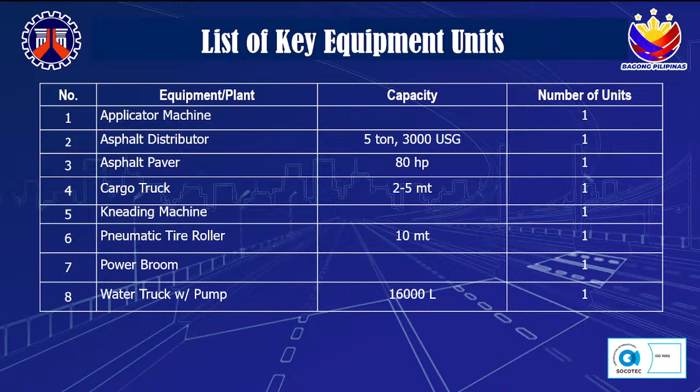Deadline for submission of clarification, March 8, 2025. Deadline for submission of bids, March 19, 2025. Number of copies of bid proposal: 1 original copy, technical and financial envelope of bid split. Place of submission of bids: bidding room, DPWH Regional Office 6, Fort San Pedro, Iloilo City.

For major category of works: buildings construction without piles, low-rise, concrete frame, 1 to 5 stories. Similar category of works: buildings construction with piles, high-rise, concrete frame, cast-in-place piles; buildings construction with piles, low-rise, concrete frame, cast-in-place piles; buildings construction with piles, high-rise, concrete frame, driven piles; buildings construction with piles, low-rise, concrete frame, driven piles; buildings construction without piles, high-rise, concrete frame.

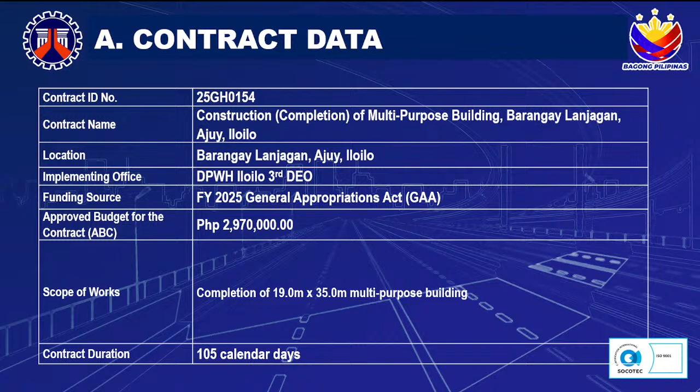ABC is 2,970,000 pesos. Scope of work: completion of a 19 meter by 35 meter multipurpose building. Contract duration is 105 calendar days.

For major category of works: buildings construction without piles, low-rise, concrete frame, 1 to 5 stories. Similar category of works: buildings construction with piles, high-rise, concrete frame, cast-in-place piles; buildings construction with piles, low-rise, concrete frame, cast-in-place piles; buildings construction with piles, high-rise, concrete frame, driven piles; buildings construction with piles, low-rise, concrete frame, driven piles; buildings construction without piles, high-rise, concrete frame.

Buildings industrial plant, low-rise; buildings industrial plant, high-rise; and buildings industrial plant, medium-rise. For the qualifier, major category of works: buildings construction without piles, low-rise, concrete frame, 1 to 5 stories. Example of qualifier: not applicable.

For list of key personnel: 1 project manager, 1 project engineer, 1 project inspector, 1 materials engineer, 1 safety officer, and 1 foreman, with a minimum of 5 years total work experience and a minimum of 5 years of experience in similar works.

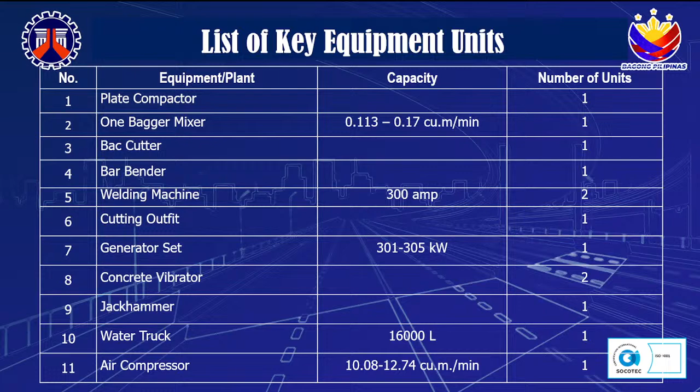For list of key equipment units: 1 plate compactor, 1 bagger mixer, 1 bar cutter, 1 bar bender, 2 welding machines, 1 cutting outfit, 1 generator set, 2 concrete vibrators, 1 jackhammer, 1 water truck, and 1 air compressor. Please take note of the capacity.

For contract ID 25GH0155, construction of multipurpose building in Barotac Viejo, Iloilo. Location: Barotac Viejo, Iloilo. Implementing office: DPWH Iloilo 3rd District Engineering Office. Funding source: FY 2025 General Appropriations Act.

ABC is 14,850,000 pesos. Scope of work: completion of multipurpose building including facilities. Contract duration is 200 calendar days.

For major category of works: buildings construction without piles, low-rise, concrete frame, 1 to 5 stories. Similar category of works: buildings construction with piles, high-rise, concrete frame, cast-in-place piles; buildings construction with piles, low-rise, concrete frame, cast-in-place piles; buildings construction with piles, high-rise, concrete frame, driven piles; buildings construction with piles, low-rise, concrete frame, driven piles; buildings construction without piles, high-rise, concrete frame.

Buildings industrial plant, low-rise; buildings industrial plant, high-rise; and buildings industrial plant, medium-rise. For the qualifier, major category of works: buildings construction without piles, low-rise, concrete frame, 1 to 5 stories. Example of qualifier: not applicable.

For list of key personnel: 1 project manager, 1 project engineer, 1 project inspector, 1 materials engineer, 1 safety officer, and 1 foreman, with a minimum of 5 years total work experience and a minimum of 5 years of experience in similar works.

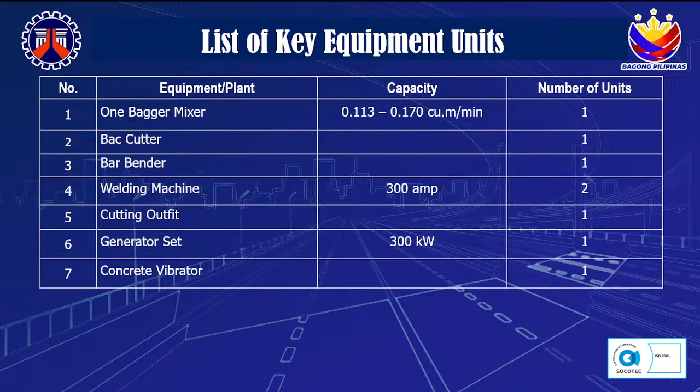For list of key equipment units: 1 bagger mixer, 1 bar cutter, 1 bar bender, 2 welding machines, 1 cutting outfit, 1 generator set, and 1 concrete vibrator. Please take note of the capacity.

For contract ID 25GH0156, construction of concrete road, construction of road, Barangay Culasi, Ajuy, Iloilo. Location: Ajuy, Iloilo. Implementing office: DPWH Iloilo 3rd District Engineering Office. Funding source: FY 2025 General Appropriations Act.

ABC is 4,950,000 pesos. Scope of work: road concreting, 0.23 meter thick by 5 meter width, PCCP with drainage. Contract duration is 50 calendar days.

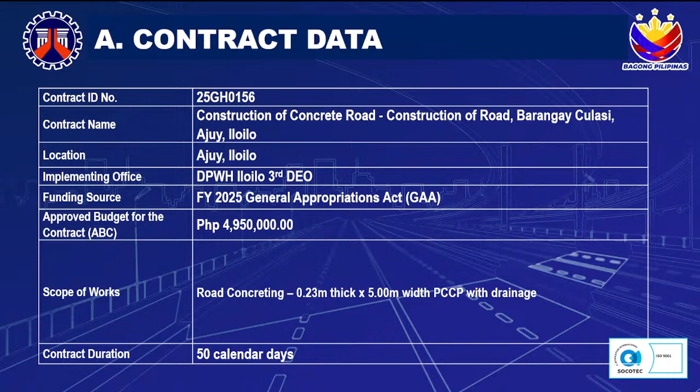For major category of works: roads construction, PCCP. Similar categories of work: road rehabilitation PCCP, roads construction tunnel PCCP. For the qualifier, major category of works: roads construction, PCCP. Example of qualifier: must have completed reconstruction and reblocking, including base course, covering 50% of the item of work of the project. May include airport runways, taxiways, and aprons.

For list of key personnel: 1 project manager, 1 project engineer, 1 project inspector, 1 materials engineer, 1 safety officer, and 1 foreman, with a minimum of 5 years total work experience and a minimum of 5 years of experience in similar works.

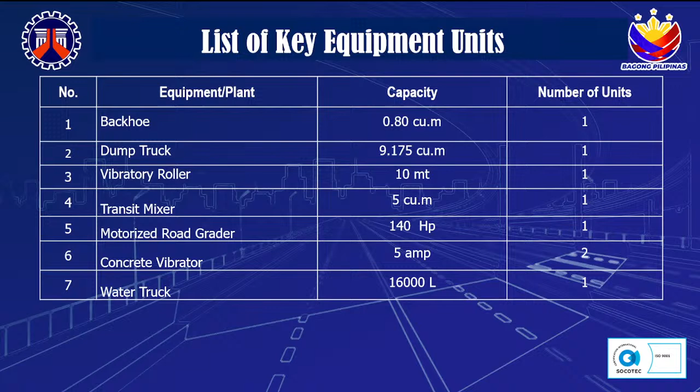For list of key equipment units: 1 backhoe, 1 dump truck, 1 vibratory roller, 1 transit mixer, 1 motorized road grader, 2 concrete vibrator, and 1 water truck. Please take note of the capacity.

For contract ID 25GH0157, rehabilitation of multi-purpose building market at Barangay Poblacion, Barotac Viejo, Iloilo. Location: Barangay Poblacion, Barotac Viejo, Iloilo. Implementing Office: DPWH Iloilo 3rd District Engineering Office.

Funding source: FY 2025 General Appropriations Act. ABC is 4,950,000 pesos. Scope of work: construction of two-story multipurpose building. Contract duration is 115 calendar days.

For major category of works: buildings construction without piles, low-rise concrete frame 1 to 5 story. Similar categories of works: buildings construction with piles, high-rise concrete frame cast-in-place piles; buildings construction with piles, low-rise concrete frame cast-in-place piles; buildings construction with piles, high-rise concrete frame driven piles; buildings construction with piles, low-rise concrete frame driven piles; buildings construction without piles, high-rise concrete frame; buildings industrial plant low-rise; buildings industrial plant high-rise; and buildings industrial plant medium-rise.

For the qualifier, major category of works: buildings construction without piles, low-rise, concrete frame 1 to 5 story. Example of qualifier: not applicable.

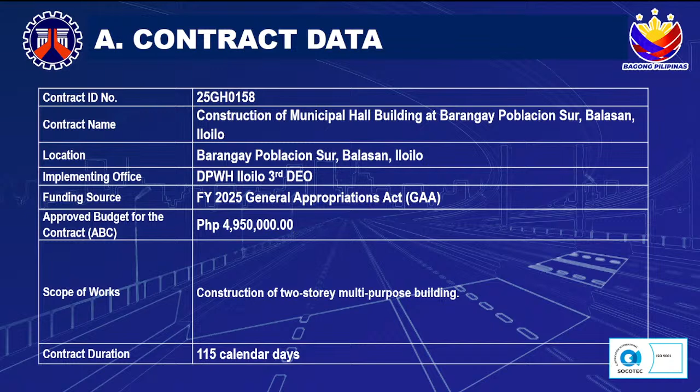For major category of works: buildings construction without piles, low-rise, concrete frame, 1 to 5 story. Similar categories of works: buildings construction with piles, high-rise, concrete frame cast-in-place piles; buildings construction with piles, low-rise, concrete frame cast-in-place piles; buildings construction with piles, high-rise, concrete frame driven piles; buildings construction with piles, low-rise, concrete frame driven piles; buildings construction without piles, high-rise, concrete frame; buildings industrial plant low-rise; buildings industrial plant high-rise; and buildings industrial plant medium-rise.

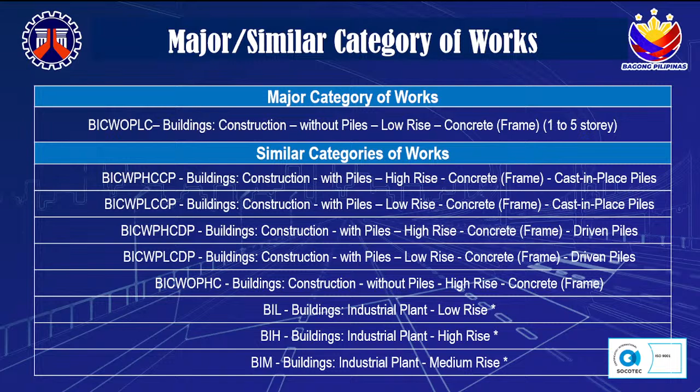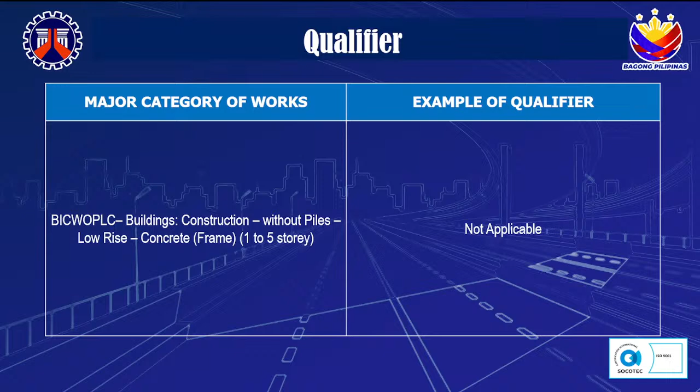For the qualifier, major category of works: buildings construction without piles, low-rise, concrete frame, 1 to 5 story. Example of qualifier: not applicable.

For list of key personnel: 1 project manager, 1 project engineer, 1 project inspector, 1 materials engineer, 1 safety officer, and 1 foreman, with a minimum years of total work experience of 5 years and minimum years of experience in similar works of 5 years.

For list of key equipment units: 1 bagger mixer, 1 bar cutter, 1 bar bender, 2 welding machine, 1 cutting outfit, 1 generator, and 2 concrete vibrator. Please take note of the capacity.

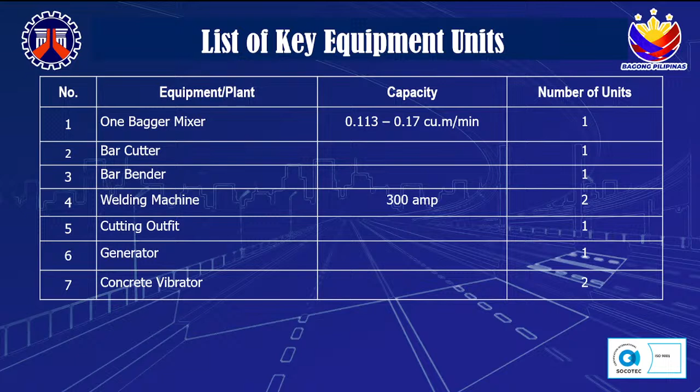For list of key personnel, for PE2: 10 contracts located within the same region for simultaneous assignments, but with an aggregate cost of 1.5 billion. For PE1: 10 contracts located within the same region for simultaneous assignments, each costing not more than 150 million, but with an aggregate cost of 1 billion.

For provisional project engineer: 10 contracts located within the same region for simultaneous assignments, each costing not more than 100 million, but with an aggregate cost of 500 million. Only accredited project engineers shall be assigned to DPWH projects, subject to the following limits of assignment.

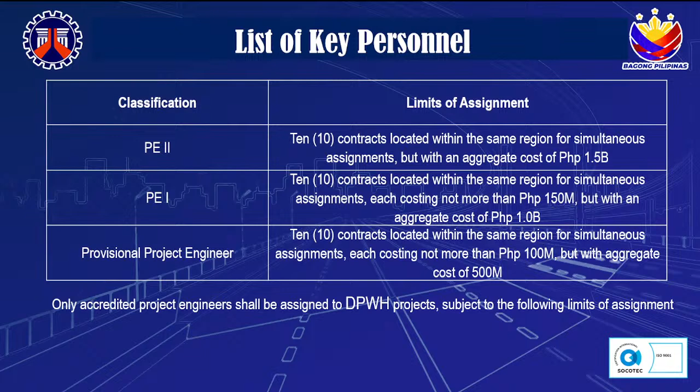For Section 17 of the data sheet, only authorized liaison officers whose name appears on the contractor's registration certificate, with presentation of his or her ID duly issued by its construction firm, shall be allowed to purchase and submit or drop bidding documents.

Schedules: deadline for submission of clarification, March 8, 2025. Deadline for submission of bids, March 19, 2025. Number of copies of bid proposal: 1 original copy, technical and financial envelope of its bid. Place of submission of bids: Bidding Room, DPWH Regional Office 6, Fort San Pedro, Iloilo City.

For the eligibility requirements, we have Class A documents, legal documents, valid PhilGEPS registration certificate, platinum membership, all pages, as per GPPB Resolution Number 15, Series of 2021.

Technical documents: we have statement of the prospective bidder of all its ongoing government and private contracts, including contracts awarded but not yet started, if any, whether similar or not similar in nature and complexity to the contract to be bid. Statement of the bidder's single largest completed contract similar to the contract to be bid, except under conditions provided under the rules, with certificate of acceptance.

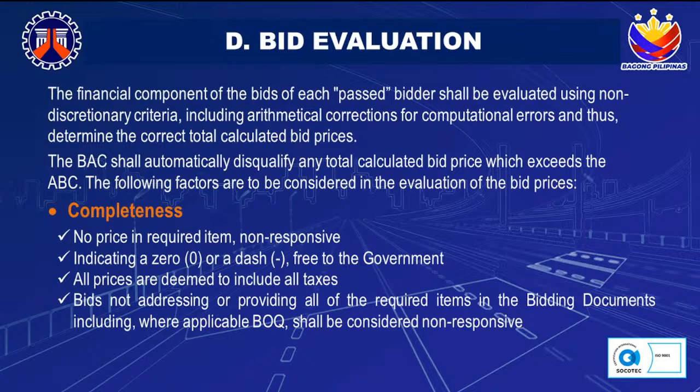For arithmetical corrections: bid prices in figures versus words, words prevail. For total price per item versus unit price per item, unit price prevails. Total price versus actual sum of component items, actual sum prevails. Unit cost in detailed estimate versus unit cost in BOQ, BOQ prevails. If above the ABC, it is disqualified.

For post-qualification, verification, validation, and ascertainment of statements made and documents submitted, we have the legal requirements: licenses, certificates, permits, agreements, and exclusion from any blacklist.

For technical requirements, key personnel minimum work experience requirements should be satisfied, and availability and commitment of major construction equipment. Failure of the prospective bidder to state the complete technical description of the pledged equipment and the specific location, whether owned, leased, or under purchase agreement, shall result in the bidder's automatic post-disqualification for award of contract and forfeiture of its bid security, as per DO number 58, series of 2012.

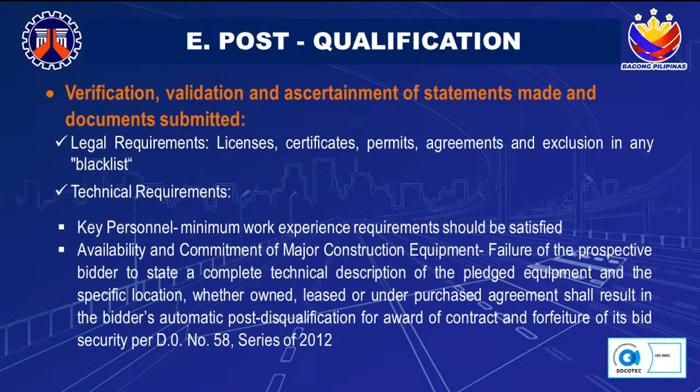For technical requirements, performance in ongoing government and private contracts: negative slippage of at least 15% in any one project, or negative slippage of at least 10% in each of 2 or more contracts. Failure of the contractor to commence repair works and complete ongoing contracts within the prescribed date after receipt of the notice of defects and deficiencies. Failure of the contractor to commence repair works on contracts with pending certificates of acceptance within the prescribed date after receipt of the notice of defects and failures. Substandard quality of works or unsatisfactory performance per contract conditions at the time of inspection.

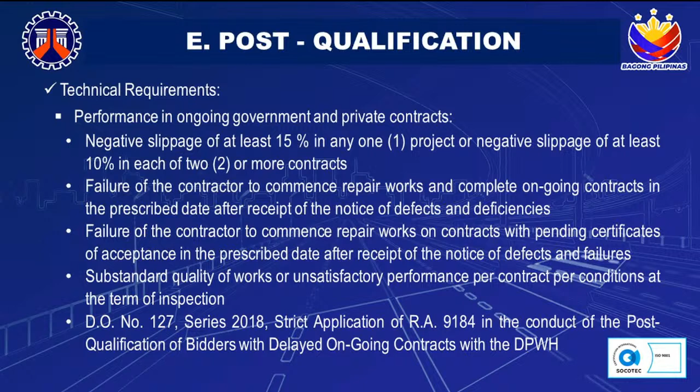DO number 127, series of 2018: strict application of RA 9184 in the conduct of post-qualification of bidders with delayed ongoing contracts with DPWH. Also considered is the authenticity and correctness of bid security, financial requirements, bid price proposal, and NFCC.

Here are the notes on the personnel and equipment requirements of the project, as per DO number 9, series of 2012, on technical requirements for civil works projects for public bidding.

If a proposed key technical personnel is an employee of the bidder and working on another project at the time of the bidding, the bidder shall submit a certification that: one, that personnel will be pulled out from the ongoing project once the bidder is awarded the contract; and two, he or she will be replaced with another person with equal or better qualifications as certified by the head of the implementing office.

Also, the bidder may propose a key technical personnel who is not its employee, provided that the said personnel submits a certification that he or she will work for the bidder if it is awarded the contract under bidding. These certifications shall be included in the first envelope of the sealed bid.

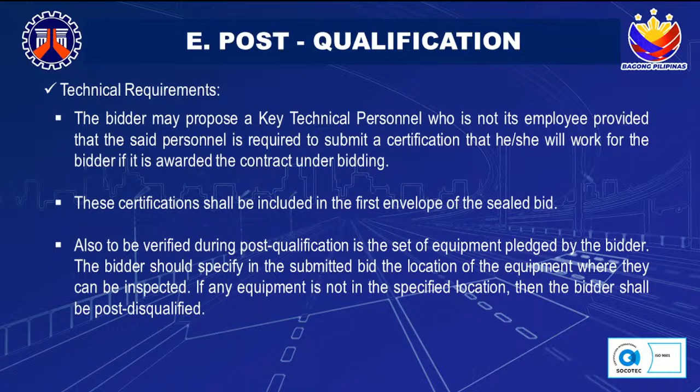Also to be verified during post-qualification is the set of equipment pledged by the bidder. The bidder should specify in the submitted bid the location of the equipment where it can be inspected, and if any equipment is not in the specified location, the bidder shall be post-disqualified.

For the contract award, the contract shall be awarded to the bidder whose bid has been determined to be the lowest calculated and responsive bid, as a result of the detailed evaluation and post-qualification conducted. Contract award should be made within the bid validity period. Subcontracting is not allowed.

GG047, contract name: procurement of supplies, parts and services for the dry docking and repair of multi-purpose amphibious dredge with DPWH number K3-08, Watermaster Classic 4, currently located at Iloilo River, Iloilo City. Location: DPWH Regional Office 6, Iloilo City.

Funding source: FY 2024 GAA. Approved budget for the contract is 13,703,880 pesos. Scope of work: vehicle parts and accessories. Contract duration: 180 calendar days.

For the schedule of requirements, for mobilization: one lump sum dismantling of main hull, side stabilizer floats, side pontoons, and loading of the dredging equipment for hauling to designated dry docking facility using one unit hydraulic crane for 3 days, one tractor with low bed for 2 days. Labor consisting of one foreman for 5 days, one crane operator for 3 days, one heavy equipment operator for 2 days, and 4 common laborers for 5 days.

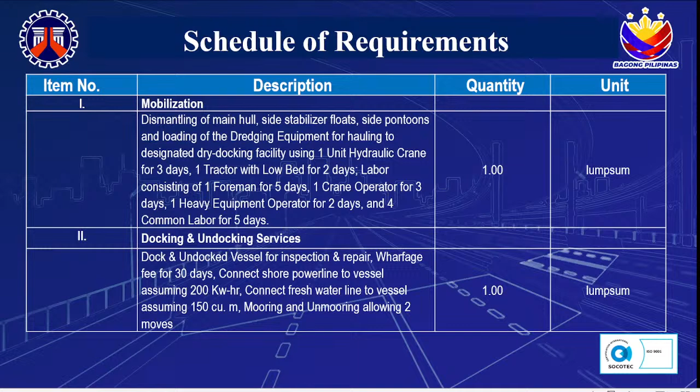For docking and undocking services: one lump sum dock and undock vessel for inspection and repair. Wharfage fee for 30 days. Connect shore power line to vessel assuming 200 kilowatt-hour. Connect fresh water line to vessel assuming 150 cubic meter. Mooring and unmooring allowing 2 moves.

For general services: one lump sum conduct hammer tests on port and starboard side hull and conduct ultrasonic gauging, allowing 15 spots for side platings, 10 spots for main deck platings, and 15 spots for bottom platings. Labor consisting of 1 UTG technician for 3 days and 2 common labor for 3 days.

For hull treatment: 1 lump sum scrape barnacles and marine growths from keel to deckline allowing 50 square meters. Labor consisting of 1 foreman for 2 days and 4 common labor for 1 day.

1 lump sum hydroblast to remove mineral deposit and contaminants using high power jet at 2,000 psi from keel to deckline, allow 50 square meters. Labor consisting of 1 operator for 1 day and 4 common labor for 1 day.

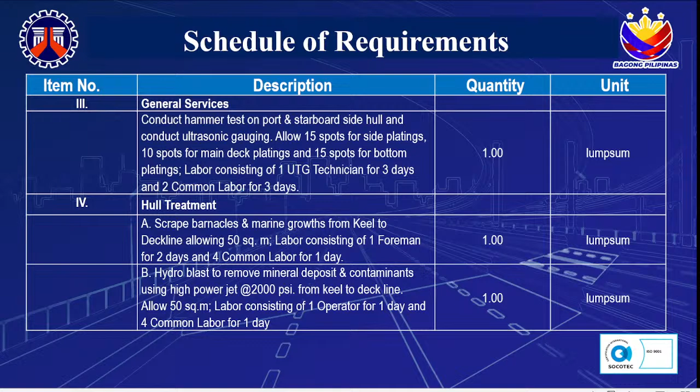For hull and main deck replating works: 1 lump sum crop out and renew the deteriorated portion of main bottom hull platings using yard supplied materials, and allow a total area of approximately 30 square meters using 10 pieces steel plate SAE 4140 heat treated 4 feet by 8 feet by 6.0 millimeters, 5 boxes welding rod Super C2 at 10 kilos per box, 8 tanks oxygen contents only, 2 tanks acetylene contents only, and 10 pieces grinding stone. Labor consisting of 1 supervisor for 25 days, 2 welders for 25 days, 2 fitters for 15 days, and 4 common labor for 25 days.

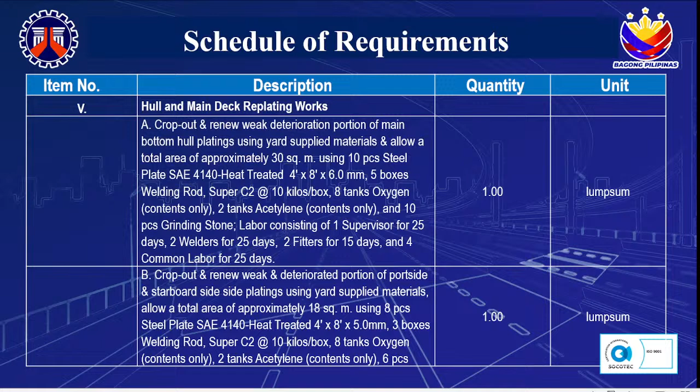1 lump sum crop out and renew weak and deteriorated portion of port side and starboard side platings using yard supplied materials. Allow a total area of approximately 18 square meters using 8 pieces steel plate SAE 4140 heat treated 4 feet by 8 feet by 5.0 millimeters, 3 boxes welding rod Super C2 at 10 kilos per box, 8 tanks oxygen contents only, 2 tanks acetylene contents only, 6 pieces grinding stone, and 4 pieces mild steel plate 6.0 millimeters by 4 feet by 8 feet. Labor consisting of 1 supervisor for 20 days, 2 welders for 20 days, 2 fitters for 10 days, and 4 common labor for 20 days.

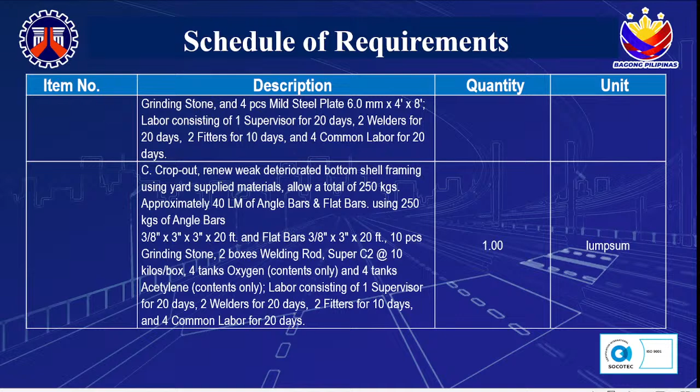1 lump sum crop out and renew deteriorated bottom shell framing using yard supplied materials. Allow a total of 250 kilograms, approximately 40 lm of angle bars and flat bars, using 250 kilograms of angle bars 3/8 inches by 3 inches by 3 inches by 20 feet, and flat bars 3/8 inches by 3 inches by 20 feet, 10 pieces grinding stone, 2 boxes welding rod Super C2 at 10 kilos per box, 4 tanks oxygen contents only, and 4 tanks acetylene contents only. Labor consisting of 1 supervisor for 20 days, 2 welders for 20 days, 2 fitters for 10 days, and 4 common labor for 20 days.

1 lump sum crop out and renew deteriorated portion of main deck platings using yard supplied materials, and allow a total area of approximately 30 square meters using 10 pieces steel plate SAE 4140 heat treated 4 feet by 8 feet by 4.0 millimeters, 5 boxes welding rod Super C2 at 10 kilos per box, 8 tanks oxygen contents only, 8 tanks acetylene contents only, and 10 pieces grinding stone. Labor consisting of 1 supervisor for 25 days, 2 welders for 25 days, 2 fitters for 15 days, and 4 common labor for 25 days.

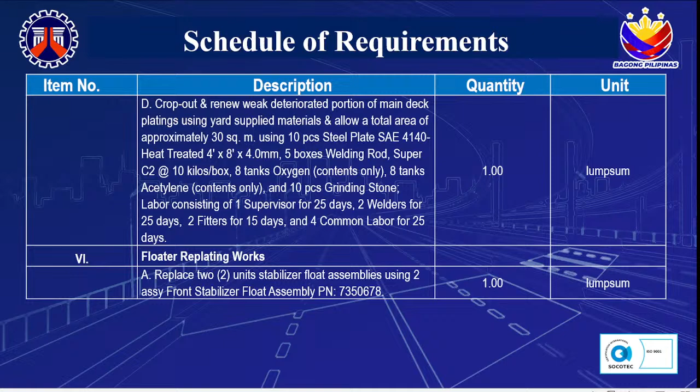For floater replating works: 1 lump sum replace 2 units stabilizer float assemblies using 2 assy front stabilizer float assembly, PN 7350678. 1 lump sum crop out and renew deteriorated portion of side pontoon plating, starboard and port side, using yard supplied materials.

Allow a total area of approximately 24 square meters using 8 pieces steel plate SAE 4140 heat treated 4 feet by 8 feet by 5.0 millimeters, 5 boxes welding rod Super C2 at 10 kilos per box, 8 tanks oxygen contents only, 8 tanks acetylene contents only, and 10 pieces grinding stone. Labor consisting of 1 supervisor for 25 days, 2 welders for 25 days, 2 fitters for 15 days, and 4 common labor for 25 days.

1 lump sum crop out, renew deteriorated side pontoon shell framing using yard supplied materials. Allow a total of 170 kilograms using 250 kilograms of angle bars, 3/8 inches by 3 inches by 3 inches by 20 feet, 2 pieces grinding stone, 4 boxes welding rod Super C2 at 10 kilos per box, 4 tanks oxygen contents only, 1 tank acetylene contents only, and 4 pieces shell expansion plan. Labor consisting of 1 supervisor for 20 days, 2 welders for 20 days, 2 fitters for 10 days, and 4 common labor for 20 days.

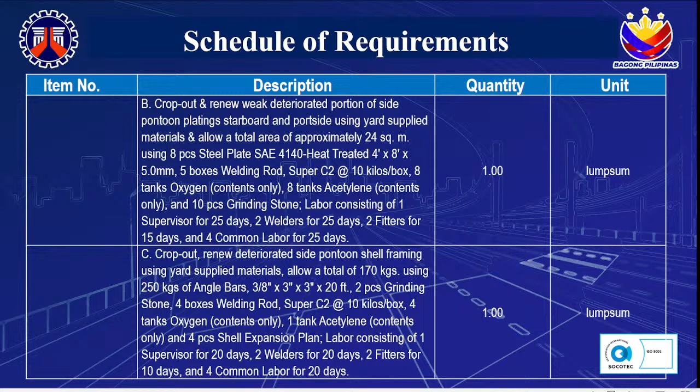For deck works, 1 lump sum onboard hydraulic pipeline replacement using 6 pieces reducer 1 inch diameter to 1/2 inch diameter, 10 pieces coupling 1/2 inch diameter, 10 pieces couplings 1 inch diameter, 10 pieces elbows 1/2 inch diameter by 90 degrees, 10 pieces elbows 1 inch diameter by 90 degrees, 6 pieces T couplings 1 inch diameter, and 6 pieces T couplings 1/2 inch diameter.

Labor consisting of 1 supervisor for 6 days, 2 hydraulic pipe technicians for 6 days, and 2 common labor for 6 days. 1 lump sum crop out renew deteriorated portion of the engine room and doors using yard supplied materials, allow a total area of approximately 11 square meters using 4 pieces steel plate SAE 4140, 4.0 millimeters by 4 feet by 8 feet, 3 boxes welding rods Super C2 at 10 kilos per box, 5 tanks oxygen contents only, 2 tanks acetylene contents only, and 6 pieces grinding stone. Labor consisting of 1 supervisor for 10 days, 2 welders for 10 days, 2 fitters for 5 days, and 4 common labor for 10 days.

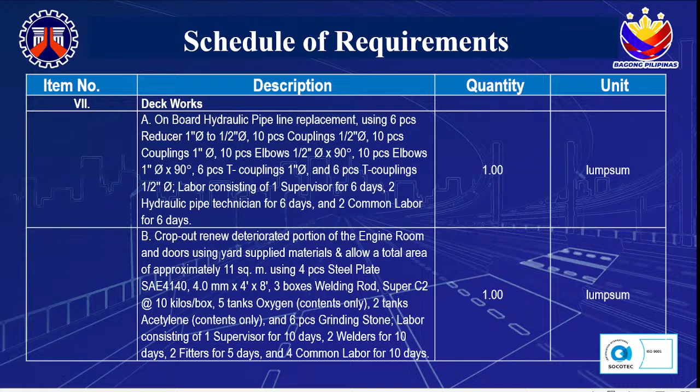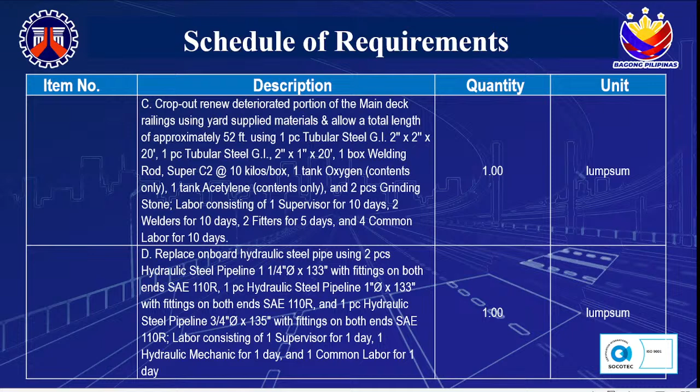1 lump sum replace onboard hydraulic steel pipe using 2 pieces hydraulic steel pipeline 1 and 1/4 inch diameter by 133 inches with fittings on both ends SAE 110R, 1 piece hydraulic steel pipeline 1 inch diameter by 133 inches with fittings on both ends SAE 110R, and 1 piece hydraulic steel pipeline 3/4 inch diameter by 135 inches with fittings on both ends SAE 110R. Labor consisting of 1 supervisor for 1 day, 1 hydraulic mechanic for 1 day, and 1 common labor for 1 day.

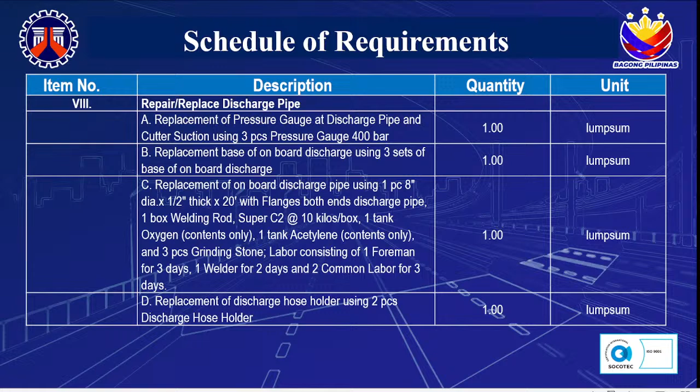1 lump sum replacement base of onboard discharge using 3 sets of base of onboard discharge. 1 lump sum replacement of onboard discharge pipe using 1 piece 8 inches diameter by 1/2 inches thick by 20 feet with flanges both ends discharge pipe, 1 box welding rod Super C2 at 10 kilos per box, 1 tank oxygen contents only, 1 tank acetylene contents only, and 3 pieces grinding stone. Labor consisting of 1 foreman for 3 days, 1 welder for 2 days, and 2 common labor for 3 days. 1 lump sum replacement of discharge hose holder using 2 pieces discharge hose holder.

1 lump sum replacement of onboard flexible discharge pipe using 1 piece flexible pipe 6 inches diameter by 7 to 8 inches, 8 ply 8 wire, 1 piece flexible pipe 6 inches diameter by 190 inches 8 ply 8 wire, 1 piece flexible pipe 6 inches diameter by 180 inches 8 ply 8 wire, 15 pieces clamp 8 inches diameter by 3/4 inches width by 5/16 inches thick stainless steel, and 1 piece adapter.

For repair replacement of propulsion unit, 1 lump sum repair replacement of propulsion unit, test for proper performance upon completion of work using 1 ASSI steering cylinder ASSI PN 2898205, 1 ASSI leveling cylinder ASSI PN 2898206, 1 piece pin of propeller swing rack PN 76503116, 2 pieces pin bushing of propeller swing rack PN 76503111, 2 pieces bearing plate of propeller swing rack PN 76503115, and 1 piece seal propeller motor.

2 pieces pin of cylinder propeller leveling PN 7650-316, 2 pieces ring of pin leveling cylinder PN 7605-133, 1 piece swing rack propeller PN 7350-086, and 1 piece hydraulic hose 1/2 inches diameter by 3000 millimeters SAE 100 R1 propeller.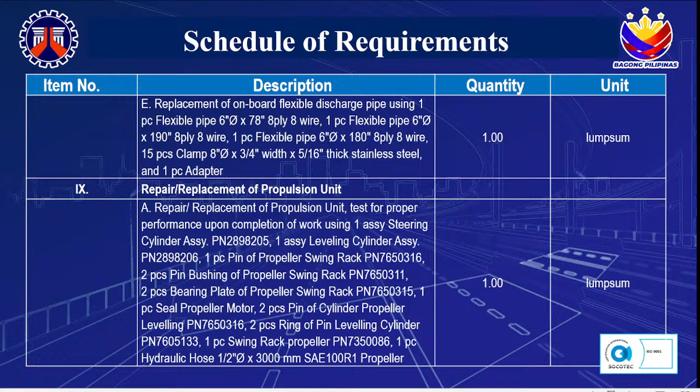Motor return. PN7350-732, 2 pieces. PN7350-730, 4 pieces fitting 3/8 inch in diameter, propeller leveling cylinder.

PN2906-550, 1 piece hydraulic hose 3/8 inch diameter by 1050 millimeters SAE 100, propeller steering. PN7651-923, 1 piece hydraulic hose 3/8 inch diameter by 1300 millimeters SAE 100, propeller steering.

PN7650-355, 2 pieces fitting 1/4 inch in diameter, propeller steering cylinder. PN2559-345, 1 piece hydraulic hose 3/8 inch diameter by 1300 millimeters SAE 100R, propeller leveling.

PN7650-355, 1 piece zinc anode. PN2898-287, 2 pieces zinc anode. PN2898-288, 1 set seal kit, steering cylinder.

PN2914-879, labor consisting of 1 supervisor for 20 days, 2 hydraulic pipe technicians for 15 days, and 2 common laborers for 20 days. For the repair of port side and starboard side front stabilizer cylinders, 1 lump sum repair of

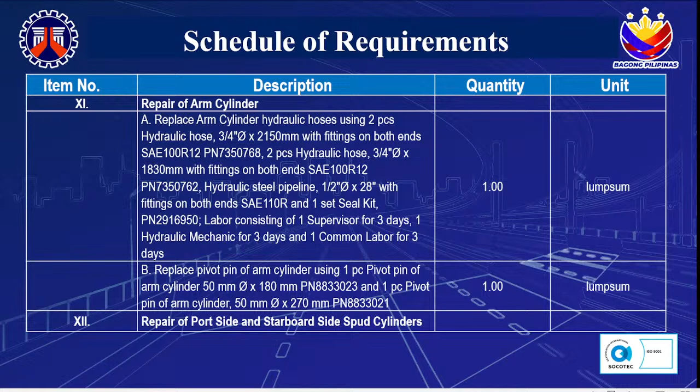1 lump sum replace starboard and port side spud hydraulic hoses and steel pipeline using 6 pieces hydraulic hose, half-inch diameter by 1150 millimeters with fittings on both ends, SAE 100 R9, PN 7351079.

2 pieces hydraulic hose, 1/4 inch diameter by 1760 millimeters with fittings on both ends, SAE 100 R2, PN 7351128. 2 pieces hydraulic hose, half-inch diameter by 1000 millimeters with fittings on both ends, SAE 100 R9, PN 7351151.

4 pieces hydraulic steel pipeline, half-inch diameter by 142 inches with fittings on both ends, SAE 110R, and 2 sets seal kit, PN 2916947.

Labor consisting of 1 supervisor for 2 days, 1 hydraulic mechanic for 2 days, and 1 common labor for 2 days. 1 lump sum replace port side chrome cylinder rod using 1 piece cylinder rod spud, PN 7351214.

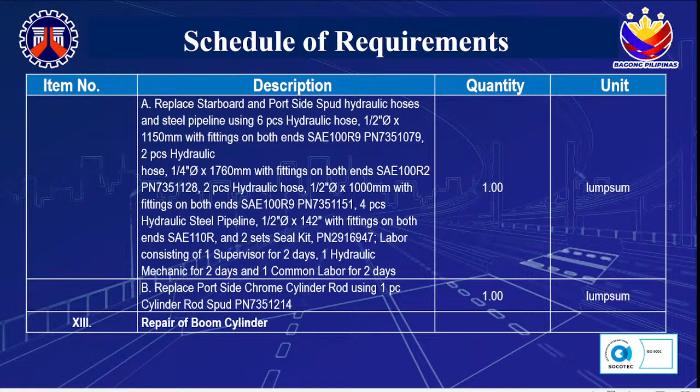For the repair of boom cylinder, 1 lump sum replace boom cylinder hydraulic hoses using 2 pieces hydraulic hose, 3/4 inch diameter by 2150 millimeters with fittings on both ends, SAE 100 R12, PN

7350768. 2 pieces hydraulic hose, 3/4 inch diameter by 1000 millimeters with fittings on both ends, SAE 100 R12, PN 7350768, and 1 set seal kit, PN

2916949. Labor consisting of 1 supervisor for 1 day, 1 hydraulic mechanic for 1 day, and 1 common labor for 1 day. 1 lump sum replace pivot pin of boom cylinder using 1 piece pivot pin of boom cylinder, 60 millimeters diameter by 168 millimeters, PN

8717014. 1 piece pivot pin of boom cylinder, 60 millimeters diameter by 230 millimeters, PN 8717003, and 1 piece cylinder rod boom, PN 7351226. For the repair of starboard side and port side tilt cylinders, 1 lump sum replace tilt hydraulic hoses

using 2 pieces hydraulic hose, half-inch diameter by 570 millimeters with fittings on both ends, SAE 100 R9, PN 7351152. 2 pieces hydraulic hose, half-inch diameter by 1350 millimeters with fittings on both ends, SAE 100 R9, PN 8714823, and 2 sets seal kit, PN

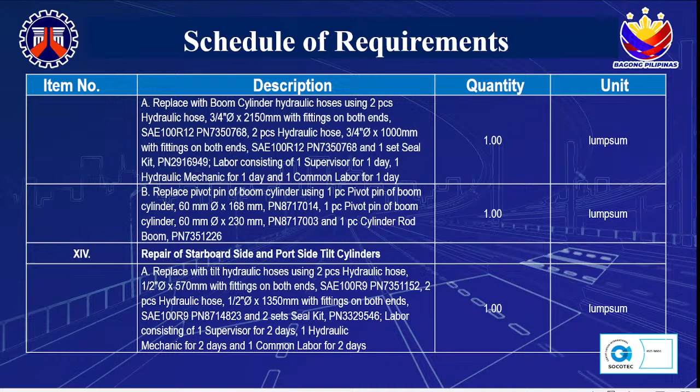3329546. Labor consisting of 1 supervisor for 2 days, 1 hydraulic mechanic for 2 days, and 1 common labor for 2 days. For the repair of left and right swing cylinders, 1 lump sum replace swing cylinder hydraulic hoses using 2 pieces hydraulic hose, half-inch diameter by 720 millimeters with fittings on both ends, SAE 100 R9, PN 7351147.

1-piece hydraulic hose, half-inch diameter by 730 millimeters with fittings on both ends, SAE 100 R9, PN 7350957. 1-piece hydraulic hose, half-inch diameter by 900 millimeters with fittings on both ends, SAE 100 R9, PN 7350956. 2 pieces hydraulic hose, half-inch diameter by 690 millimeters with fittings on both ends, SAE 100 R9, PN 7350765, and 2 sets seal kit, PN 2916472.

Labor consisting of 1 supervisor for 2 days, 1 hydraulic mechanic for 2 days, and 1 common labor for 2 days. For the repair of bucket cylinder, 1 lump sum repair of bucket cylinder using 4 pieces ball joint bushing with housing as per sample.

8 pieces lock ring for ball joint, PN 2595332, 4 pieces grease nipple, 1 piece cylinder rod bucket, PN 7351234, and 1 set seal kit, PN 3329546. Labor consisting of 1 foreman for 7 days, 1 heavy equipment mechanic for 7 days, and 2 common labor for 7 days.

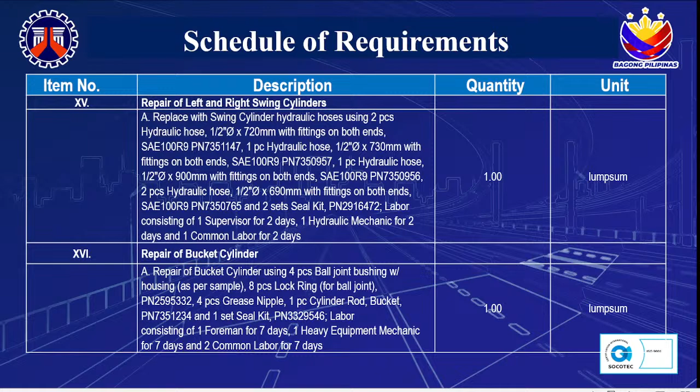1 lump sum replace bucket cylinder hydraulic hoses using 2 pieces hydraulic hose, 3/4-inch diameter by 2,150 millimeters with fittings on both ends, SAE 100 R12, PN 7350768.

2 pieces hydraulic hose, 3/4-inch diameter by 1,430 millimeters with fittings on both ends, SAE 100 R12, PN 7350760.

1 piece hydraulic hose, 3/4-inch diameter by 630 millimeters with fittings on both ends, SAE 100 R12, PN 7350736.

1 piece hydraulic hose, 3/4-inch diameter by 1,160 millimeters with fittings on both ends, SAE 100 R12, PN 7350759. Labor consisting of 1 supervisor for 3 days, 1 hydraulic mechanic for 3 days, and 2 common labor for 3 days.

1 lump sum replace pivot pins of bucket cylinder using 1 piece pivot pin of bucket cylinder, 60 millimeters diameter by 354 millimeters, PN 8833018.

1 piece pivot pin of bucket cylinder, 50 millimeter diameter by 110 millimeters, PN 8833027. 1 piece pivot pin of bucket cylinder, 50 millimeter diameter by 98 millimeters, PN 7652879.

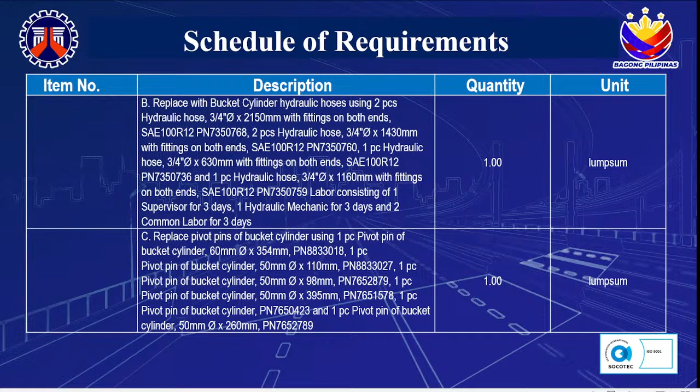1 lump sum replace entire bucket assembly using 1 assy bucket assembly, PN 7250115. For the repair of cutter pump, 1 lump sum repair of cutter pump head assy using 1 piece bearing, dredge pump housing, PN 2861308.

1 piece sleeve, dredge pump housing, 2 pieces bearing, dredge pump housing, PN 7653081, 1 piece intermediate sleeve, 1 piece O-ring, PN 2617230.

2 pieces cotter pin, 1 piece O-ring, PN 2916965, 1 piece O-ring, PN 2916566, 1 piece flow indicator, 1 piece quick coupling, 2 pieces fitting, 1 piece nipple fitting.

Labor consisting of 1 foreman for 4 days, 1 heavy equipment mechanic for 4 days, and 2 common labor for 4 days. 1 lump sum replace with new cutter suction hydraulic hoses and steel pipeline using 2 pieces hydraulic hose, 1 inch diameter by

1,330 millimeters with fittings on both ends, SAE 100 R11, PN 7350764.

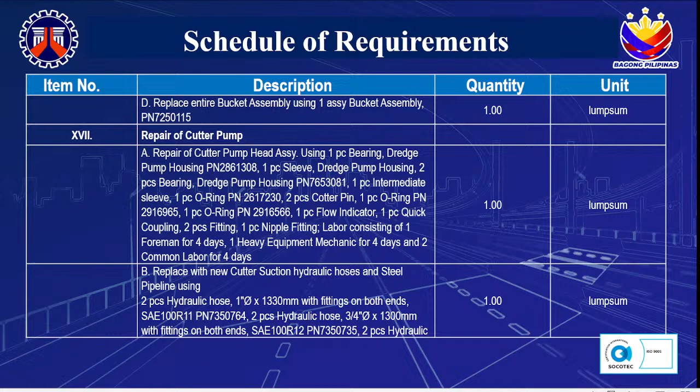2 pieces hydraulic hose, 3/4-inch diameter by 1,160 millimeters with fittings on both ends, SAE 100 R12, PN 7350759.

2 pieces hydraulic hose, 3/4-inch diameter by 1,700 millimeters with fittings on both ends, SAE 100 R12, PN 7351146.

1 piece hydraulic hose, 1/4-inch diameter by 520 millimeters with fittings on both ends, SAE 100 R2, PN 8716452.

2 pieces hydraulic hose, 1/4 inch diameter by 350 millimeters with fittings on both ends, SAE 100 R2, PN 8708548. 1 piece hydraulic hose, 3/8 inch diameter by 330 millimeters with fittings on both ends, SAE 100 R2, PN 7351150.

1 piece hydraulic hose, 1/4 inch diameter by 800 millimeters with fittings on both ends, SAE 100 R9, PN 8708927. 2 pieces hydraulic hose, 1 inch diameter by 2000 millimeters with fittings on both ends, SAE 100 R11, PN 7350790.

3 pieces hydraulic hose, 3/4 inch diameter by 1950 millimeters with fittings on both ends, SAE 110R, PN 7350792. 1 piece hydraulic hose, 3/4 inch diameter by 295 millimeters with fittings on both ends, SAE 100 R1, PN 7350793.

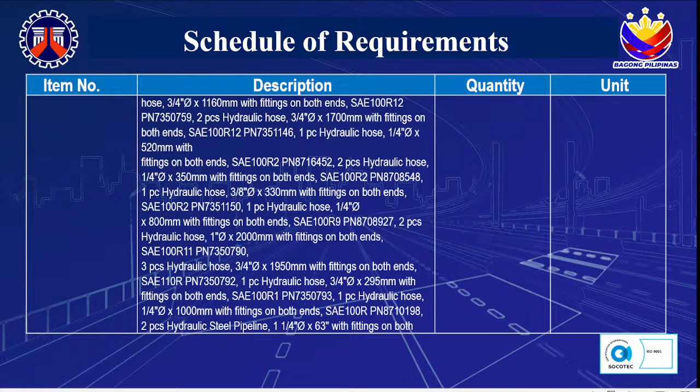1 piece hydraulic hose, 1/4 inch diameter by 1000 millimeters with fittings on both ends, SAE 100R, PN 8710198. 2 pieces hydraulic steel pipeline, 1 1/4 inch diameter by 63 inches with fittings on both ends, SAE 110R.

3 pieces hydraulic steel pipeline, 3/4 inch diameter by 104 inches with fittings on both ends, SAE 110R.

3 pieces hydraulic steel pipeline, 3/4 inch diameter by 45 inches with fittings on both ends, SAE 110R. 2 pieces hydraulic steel pipeline, 1 1/4 inch diameter by 45 inches with fittings on both ends, SAE 110R.

Labor consisting of 1 supervisor for 3 days, 1 hydraulic mechanic for 3 days, and 2 common labor for 3 days. For the replacement of hydraulic hoses of pilot house and solenoid valve, 1 lump sum replaced with pilot house and solenoid valve hydraulic hoses using 3 pieces hydraulic hose 1/4 inch diameter by 800 millimeters with fittings on both ends, SAE 100R9.

PN 8708927. 1 piece hydraulic hose 1/4 inch diameter by 1000 millimeters with fittings on both ends, SAE 100R9 PN 8710198. 1 piece hydraulic hose 3/8 inches diameter by 1100 millimeters with fittings on both ends, SAE 100R9 PN 8716869.

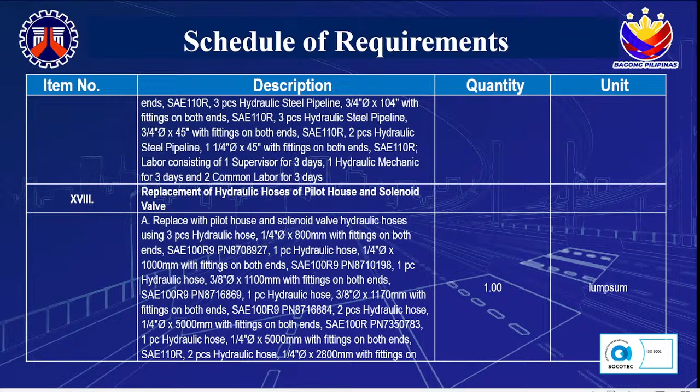1 piece hydraulic hose 3/8 inch diameter by 1170 millimeters with fittings on both ends, SAE 100R9 PN 8716884. 2 pieces hydraulic hose 1/4 inch diameter by 5000 millimeters with fittings on both ends, SAE 100R PN 7350783. 1 piece hydraulic hose 1/4 inch diameter by 5000 millimeters with fittings on both ends, SAE 110R.

2 pieces hydraulic hose 1/4 inch diameter by 2800 millimeters with fittings on both ends, SAE 110R. 2 pieces hydraulic hose 3/8 inch diameter by 250 millimeters with fittings on both ends, SAE 100R2 PN 7351082. 1 piece hydraulic hose 1/4 inch diameter by 800 millimeters with fittings on both ends, SAE 100R2 PN 8708927.

1 piece hydraulic hose 3/8 inch diameter by 6000 millimeters with fittings on both ends, SAE 100R2 PN 7350787. 1 piece hydraulic hose 3/8 inch diameter by 2400 millimeters with fittings on both ends, SAE 100R PN 8716445. 1 piece hydraulic hose 3/8 inches in diameter by 850 millimeters with fittings on both ends, SAE 100R2 PN 8716927.

2 pieces hydraulic hose 1/4 inch diameter by 145 mm with fittings on both ends, SAE 100R PN 7350781. 2 pieces hydraulic hose 1/4 inch diameter by 1000 mm with fittings on both ends, SAE 100R PN 8710198. 1 piece hydraulic hose 1/4 inch diameter by 520 mm with fittings on both ends, SAE 100R2 PN 8708927.

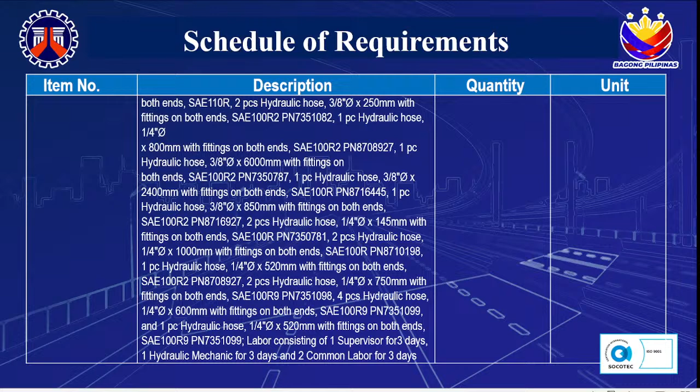PN 7351099. Labor consisting of 1 supervisor for 3 days, 1 hydraulic mechanic for 3 days, and 2 common labor for 3 days. For the engine overhauling and calibration, 1 lump sum disassemble and unship to radiator shop, radiator assembly for proper rehabilitation and assembled back in good order upon completion of work. Includes radiator general overhauling using 2 pieces upper and lower hoses with clamp, 18 liters coolant, and 1 piece fan belt.

1 lump sum replace engine valve, seat and guide, crankshaft bearing, camshaft bushing, connecting rod bearing, piston ring, and cylinder head. Machine crankshaft to restore proper tolerances. Using 1 set valve seat, 12 pieces valve guide, 1 set crankshaft bearing, 1 set camshaft bushing, 1 set connecting rod bearing, 1 set piston ring, and 1 set cylinder head. Overhauling gasket includes 1 job machining of crankshaft.

1 lump sum conduct engine tune-up. Replace filters using 50 liters engine oil on site, 300 liters hydraulic oil on site, 500 liters fuel on site, 4 pieces hydraulic return filter, 1 piece hydraulic pilot filter, 1 piece hydraulic drain filter, 1 piece hydraulic breather filter.

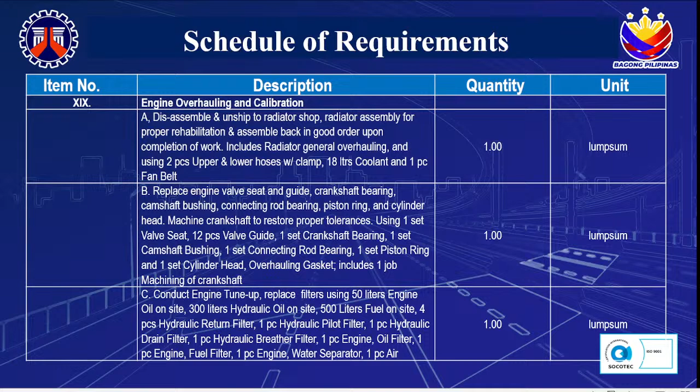1 piece engine oil filter, 1 piece engine fuel filter, 1 piece engine water separator, 1 piece air cleaner inner, 1 piece air cleaner outer. Labor consisting of 1 foreman for 10 days, 1 heavy equipment mechanic for 10 days, and 1 common labor for 10 days, includes 1 job engine tune-up and calibration.

1 lump sum replacement of electric fuel pump using 1 unit electric fuel pump, PN 7650689. For the repair of centralized automatic lubrication distribution system, 1 lump sum conduct general repair on said unit to put back to its original function.

Using 200 meter copper tubing, 4 millimeter diameter, 200 meter flexible hose, 4 mm ID half-inch OD, 10 units distribution valve box type as per sample with fittings, 50 pieces fittings male and female as per sample. Labor consisting of 1 supervisor for 5 days, 1 hydraulic mechanic for 5 days, and 1 common labor for 5 days.

For operators cabin works, 1 lump sum conduct repair of air conditioning unit of dredge on board and air conditioning unit cover, unship to air conditioning shop for repair and install back to dredge and test for proper performance after completion of work. Using 1 unit air conditioning unit.

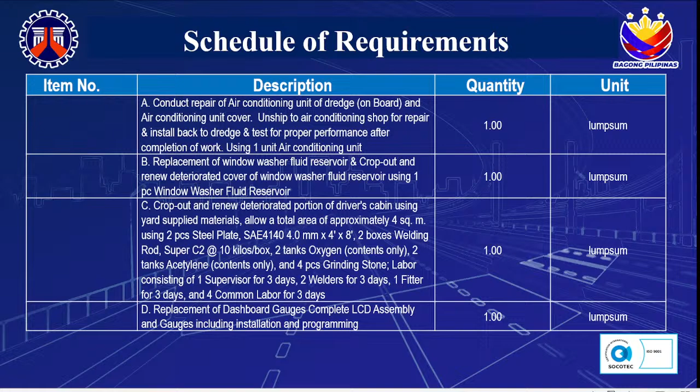1 lump sum replacement of dashboard gauges, complete LCD assembly and gauges including installation and programming.

For the replacement of hydraulic cooler hoses, 1 lump sum replaced with hydraulic cooler hoses using 2 pieces hydraulic hose 3/4 inch diameter by 1,450 millimeters with fittings in both ends, SAE 100R PN 7350782; 1 piece hydraulic hose 1/2 inch diameter by 800 millimeters with fittings in both ends, SAE 100R9 PN 2902930; 1 piece hydraulic hose 1/2 inch diameter by 730 mm with fittings in both ends, SAE 100R9 PN 7350957; 1 piece hydraulic hose 1/2 inch diameter by 2500 mm with fittings in both ends, SAE 100R9 PN 7350798; 1 piece hydraulic hose 1/2 inch diameter by 500 millimeters with fittings on both ends, SAE 100R9 PN 8716774; 1 piece hydraulic steel pipeline 1 and 1/4 inch diameter by 110 inches with fittings on both ends, SAE 110R. Labor consisting of 1 supervisor for 3 days, 1 hydraulic mechanic for 3 days, and 1 common labor for 3 days. For the hull prevention works,

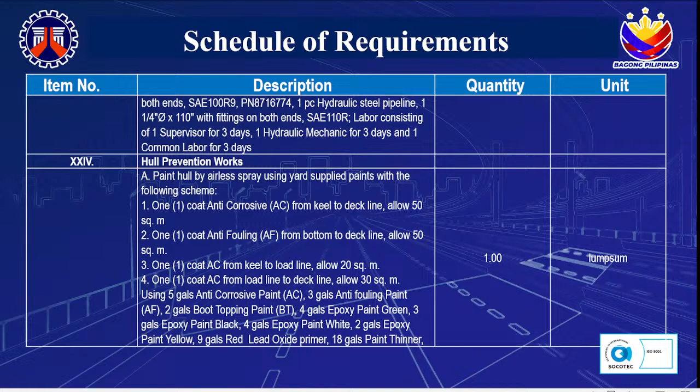Using 5 gallons anti-corrosive paint, 3 gallons anti-fouling paint, 2 gallons boot topping paint, 4 gallons epoxy paint green, 3 gallons epoxy paint black, 4 gallons epoxy paint white, 2 gallons epoxy paint yellow, 9 gallons red lead oxide primer, 18 gallons paint thinner lacquer, 25 pads sandpaper number 120, 25 pads sandpaper number 300, 25 pieces masking tape, and 4 pieces paintbrush 2 inches. Labor consisting of 1 foreman for 20 days, 2 painters for 20 days, 2 common labor for 20 days with rental for compressor with spray gun for 20 days.

For performance trial, 1 lump sum conduct performance trial for at least 4 operating hours, in the presence of Dredge personnel on board, Regional Inspectorate Team, COA and DPWH BOEFED representative upon completion of work. Diesel fuel and lubricating oil and other lubricants must be provided by the contractor.

Using 510 liters diesel fuel, 300 liters hydraulic oil AW68, 25 liters engine oil 15W-40, 25 tubes grease LGI number 2, 2 pails multi-purpose grease, and 6 liters gear oil.

For demobilization, 1 lump sum reassembly of main hull, side stabilizer floats, side pontoons, and loading of the dredging equipment for hauling to designated dredging site using 1 unit hydraulic crane for 3 days, 1 tractor with low bed for 2 days. Labor consisting of 1 foreman for 5 days, 1 crane operator for 3 days, 1 heavy equipment operator for 2 days, and 4 common labor for 5 days.

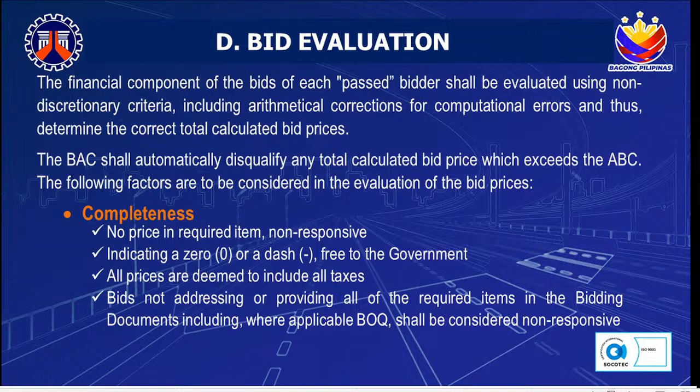The following are the factors to be considered in the evaluation of bid prices: completeness, no price in a required item is non-responsive, indicating a 0 or a dash means free to the government, and all prices are deemed to include all taxes. Bids not addressing or providing all of the required items in the bidding documents, including where applicable the BOQ, shall be considered non-responsive. For arithmetical corrections, bid prices in figures versus words: words prevail.

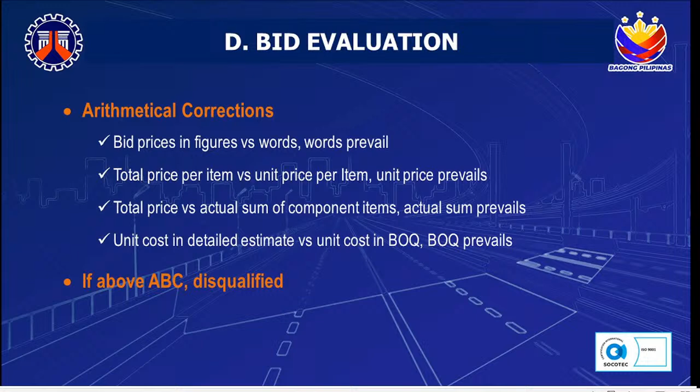Total price per item versus unit price per item: unit price prevails. Total price versus actual sum of component items: actual sum prevails. Unit cost in detailed estimate versus unit cost in BOQ: BOQ prevails. If above the ABC, it is disqualified.